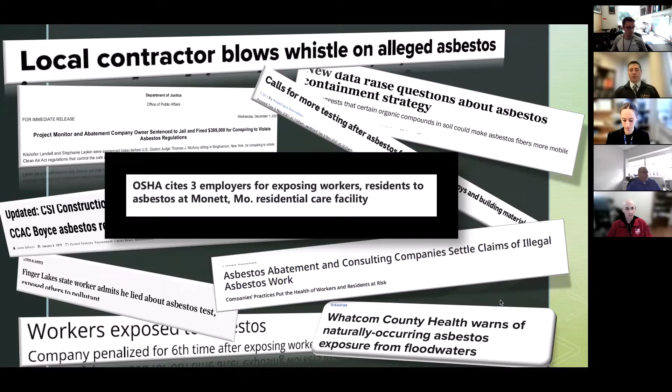But the fact is these are headlines from the last year, many from the last couple of weeks, of how asbestos is still in the forefront of the minds across the nation, and definitely as far as enforcement goes. Our local media agencies are always apt to jump on any chance they can to talk about an asbestos scare, particularly in schools.

So what regulations apply when it comes to asbestos? In New York State, we're very highly regulated. We have several federal regulations. We have the state regulation. And then if you're in a local jurisdiction such as New York City, you have your own. I highlighted two here that are going to be the focus of the conversation today. And that's asbestos in general industry regulation from OSHA, as well as Industrial Code Rule 56, which is the state regulation.

The reason why I'm focusing on these is the other ones that you see have a high level of enforcement. NESHAP highly regulates building demolition and major renovations. AHERA in schools, the different factions between the unions that are in schools, the parent-teacher organizations, it puts schools under a microscope. And whenever something's under a microscope, the enforcement action is there. And then if you're operating asbestos in construction or in the shipyard industry, again, if you're working with asbestos, you're highly trained here in New York, and the enforcement is high. And anyone who has the opportunity to work in New York City, you're well aware that the court systems are overloaded with asbestos claims and lawsuits. So there's no shortage of compliance there.

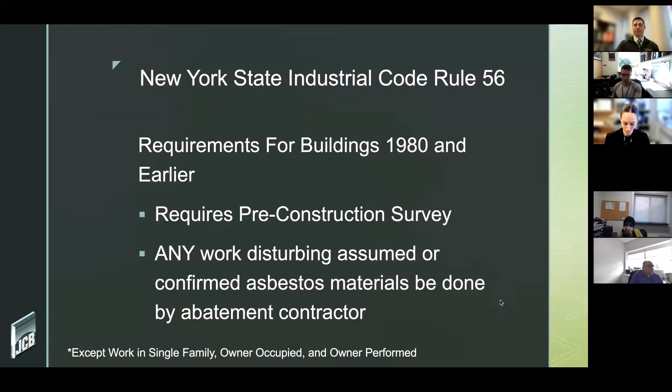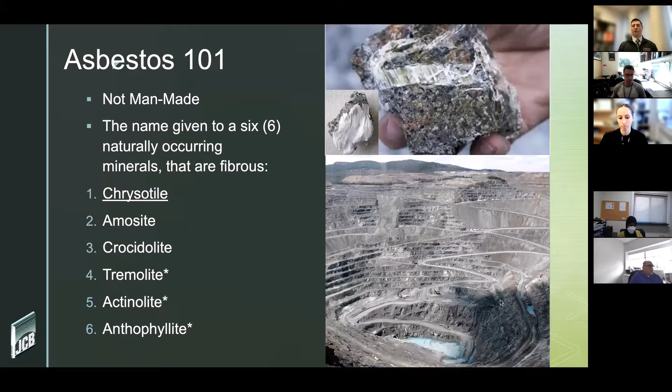It's been touted as the miracle fiber for many of its physical properties. It's resistant to heat, corrosion, fire, chemical reactions. It's biologically resistant. Mold won't grow on it. It has a high tensile strength and it could be woven into various fabrics and liners. It doesn't evaporate or dissolve, and can remain virtually unchanged under many, many conditions. It is very lightweight and therefore it can remain suspended in air and water and be carried long distances by either.

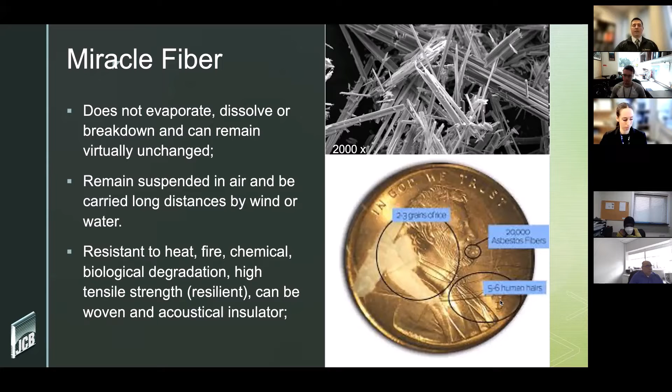Uses of asbestos go back hundreds of thousands of years. It has been found in debris from the Stone Age. Even in the Roman Empire, it's been found in fabrics woven for table linens.

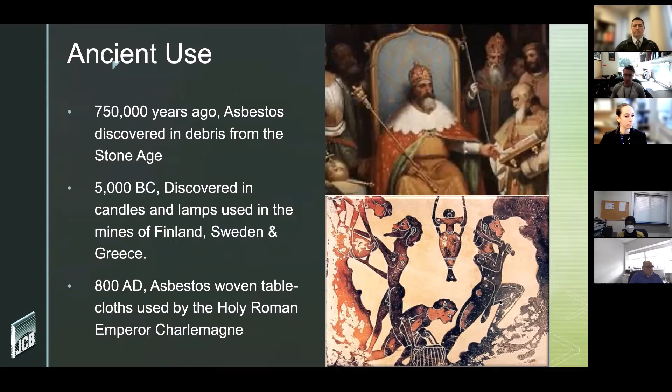But with modern day uses, the first commercial mine opened in North America around 1887. By 1930, production increased and it became the most popular construction material in the United States. And by 1980, it's been used in over 3,000 commercial products.

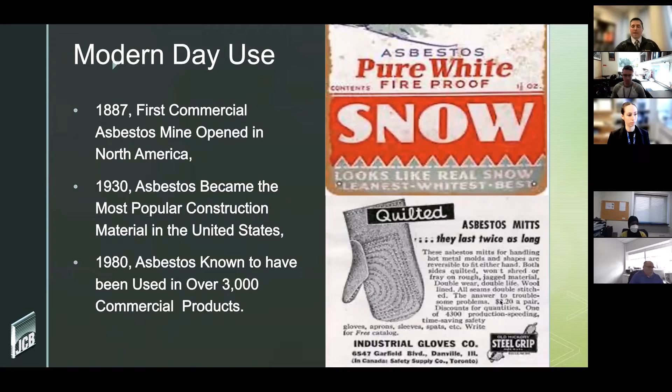For example, here we have some asbestos oven mitts where it's been woven into the fiber for its heat resistance and fire resistance. And the next slide is a couple of advertisements over the years, some scenarios that seem funny to us, but it just shows how commonplace asbestos was in our everyday life.

We have baby clothes made out of asbestos. You know, the Wizard of Oz, the fake snow used in the movie contained asbestos. All of these show how much it was common and not as feared as it is today.

Other places where we see it: vermiculite, another mineral that is common to potting soil. Asbestos is often found around the same deposits that vermiculite comes from. So we may see it in those types of applications, as well as our vehicles. Not only our buildings, we've put it in our vehicles. Brake pads, clutches, and gaskets have all contained asbestos over the years. But the most common use is for construction materials for buildings built prior to 1990.

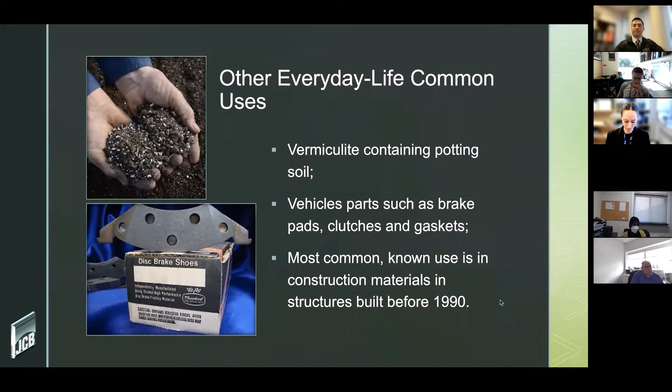So with all of the uses of asbestos, it's almost easier to start with what doesn't contain asbestos. And it basically comes down to these couple of materials: plastic and rubber, glass, wood, and metal. Almost every other type of composition out there has been industrially or commercially known to contain asbestos in its manufacture at some point.

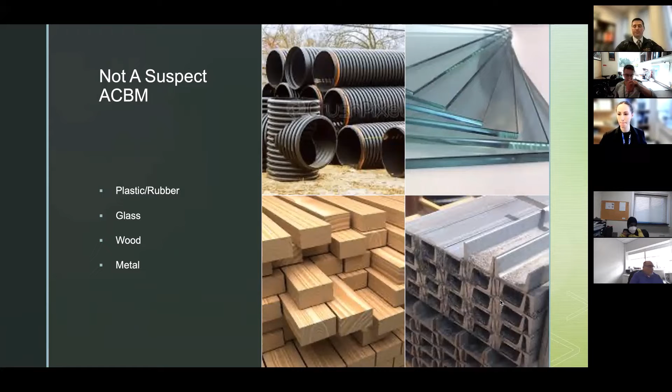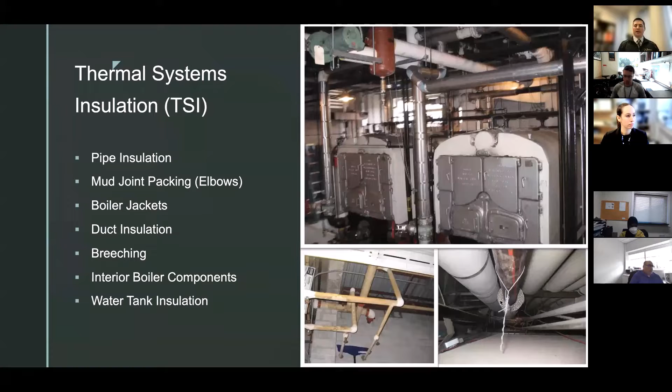Starting with the 3 categories that we classify asbestos-containing materials, we have thermal systems insulation. Again, OSHA requires that your buildings be surveyed for TSI, surfacing materials, and some flooring materials. So TSI is any product that is insulation that is meant to prevent either heat gain or loss from a piece of equipment. This is the material that most people associate with asbestos that we look for in our buildings. Pipe insulation, mud joints, duct insulation, interior components of boilers, water tanks, very commonplace materials.

The second type is surfacing materials. These are materials that are typically troweled on or spray applied when they're put into our buildings. And often the asbestos was mixed on site within the matrix of these materials as it's being installed. Some examples: ceiling and wall plaster and spray-on fireproofing material.

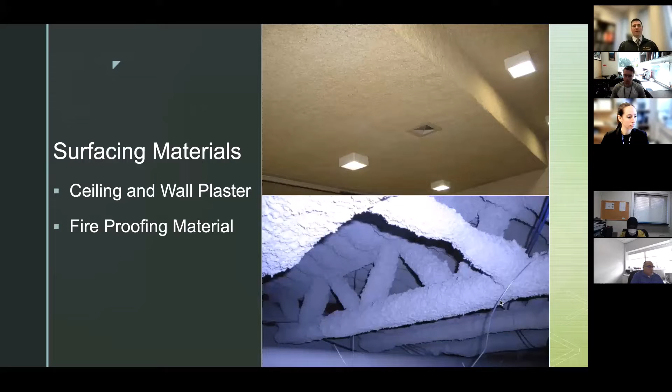Now, on the last 2 slides, we only saw about 8 different examples of asbestos-containing materials for TSI and surfacing. So everything else that doesn't fall into these categories falls into the very general miscellaneous category. And this is where we're going to find most of our building materials. Things like ceiling tiles, floor tiles, decking materials, cement transite, door insulations, various kinds of flooring, caulking materials, window glazing, auditorium curtains. The list goes on and on. This is not by any means an exhaustive list, just the most common that we see in everyday office and commercial buildings.

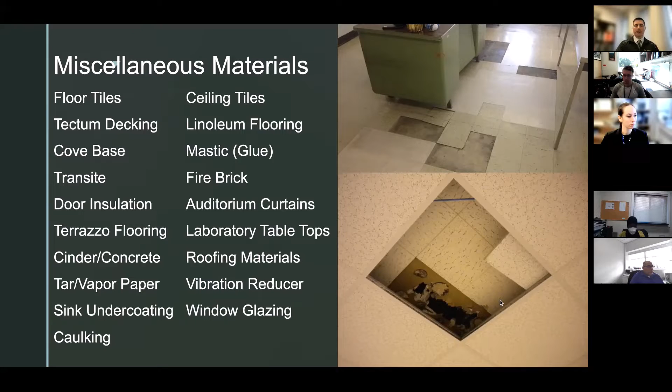So I always bring up with all these products that contain asbestos or could contain asbestos, how many here on the Zoom have performed renovations in their home or have had renovations in their offices, if they've been built prior to 1980?

For example, in your home, all of these products are potential sources of asbestos. Everything from the roof on top of your house, the roof gutters could be made of asbestos cement, heat shields for your lighting, your ceiling and wall materials, your floor materials, and then of course the ones that we always think of is the boiler and pipe insulation materials.

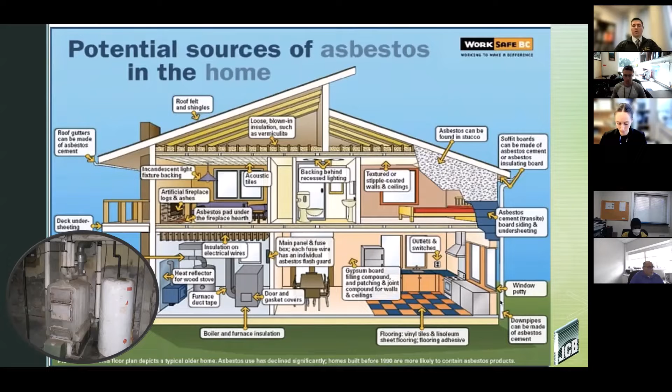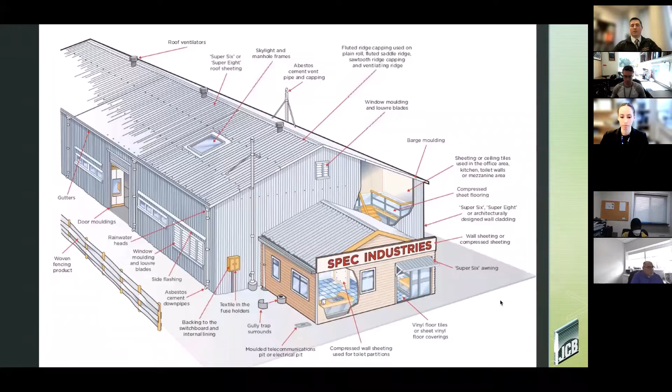Similarly, in an industrial or commercial setting, these are the same list of materials that we see in our homes, just more with a commercial or industrial application. Same thing, the roof, the skylight moldings, the skylight caulkings, chimney vents, chimney liners, as well as the interior materials, floor tile, ceiling tile, wall materials.

So with all of this said, asbestos is in our environment. It's all around us. We could expect that to a certain degree, everyone on the planet is exposed to some prevailing background level of asbestos, both from naturally occurring sources. Remember, it's a natural mineral, and natural minerals and rocks erode over time, and those asbestos fibers are going to

get into the air. Similarly, our manufactured materials, such as brake pads: if you had an asbestos-containing brake pad, every time you step on the brake, a little bit of that brake pad grinds off, and those fibers are released into the air. So there are background levels of asbestos in our environment.

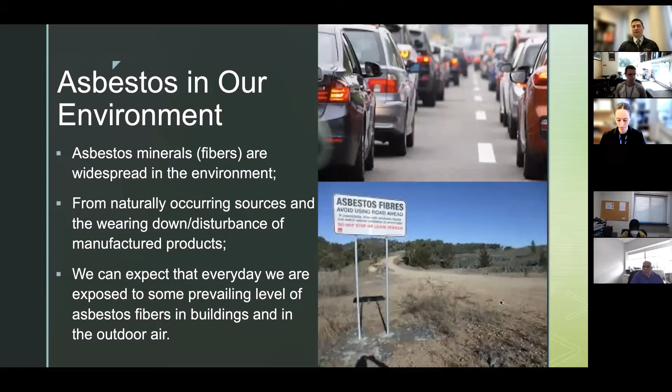So how does this affect us? If asbestos is all around us and it can make you sick, how can it make us sick? Just like any other toxin, it must enter our body. Different toxins enter our body in different ways, whether it be absorption, ingestion, inhalation. And we also need a certain exposure to it, a dose.

But if I start having several over a short period of time, I'm going to feel the effects pretty hard. And if I were to have the entire bottle in a single setting, I'm probably going to need a hospital. Similar with any other toxin, the more that you're exposed to it, the more of an effect. And it matters whether that's an exposure over a short period of time, an acute exposure, versus an exposure that lasts over a long duration, a chronic exposure.

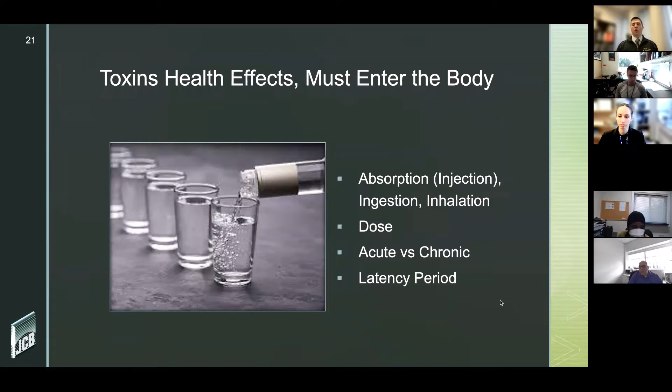And it also matters for the disease that's going to be affected. How long after the exposure does it take for your body to show the effects in the form of a disease or a condition?

Specifically for asbestos, the primary route of exposure is inhalation. As we breathe it in, some of these fibers bypass our body's natural defenses. They'll get past our nose hairs, past our mucous membranes, past the cilia, and some of those fibers will reach down to the deepest parts of our lungs in the alveoli. This is where the air exchange occurs, where oxygen from the air is transferred to our bloodstream and is traded off for the carbon dioxide.

As the asbestos fibers get deep down into our lungs, some of these are going to cause a cut in that alveoli. With any cut in your body, it's going to create a scab and a scar. You create enough of these, have enough fibers make these cuts, and have more scarring. This leads to a condition of asbestosis, where essentially the efficiency of the oxygen carbon dioxide exchange for your body is decreased to a specific level that is classified as asbestosis.

And with any other foreign element that enters your body, the cells could deform, resulting in a cancer. In this case, it would be a lung cancer. A rarer form of cancer that could be caused by asbestos exposure is mesothelioma. It does take a certain amount of time, that latency period, from the onset of an exposure to when the disease shows itself. For asbestos, that's about 20 to 30 years, with an increased chance of the onset of disease if you're a smoker, about 60 times increase.

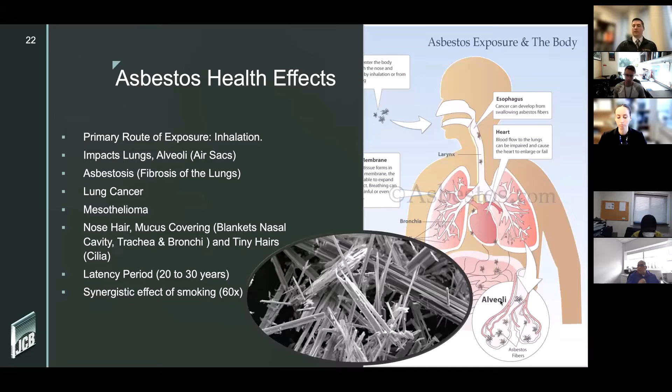So there have been studies. The Agency for Toxic Substances and Disease Registry has measured the background ambient exposure for asbestos fibers. They've determined that we breathe about a cubic meter of air in an hour, and that for background asbestos, depending on where you live, that exposure could be anywhere between 10 fibers to 10,000 fibers an hour. 10 fibers if you're in an outdoor rural area, 10,000 fibers if you have the unfortunate scenario of living next to an asbestos mine.

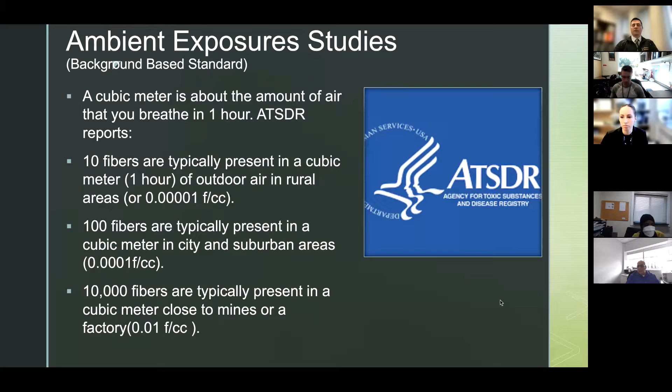But most of us are in city and suburban areas, and we could expect about 100 fibers in a given hour. And because our laboratory data for air samples gets reported in fibers per cubic centimeter, that translates to 0.0001 fibers per cc.

So again, as far as health-based standards, the risk of asbestos-related disease depends upon the exposure by inhalation, and it is dose-related. Most of the people who have developed asbestos-related diseases are former asbestos workers, because they were exposed to a lot more fibers on a given day over their lifetime than the average office worker or employee. The average airborne levels in buildings, even if they contain asbestos, are so low that the threat to building occupants is therefore also low.

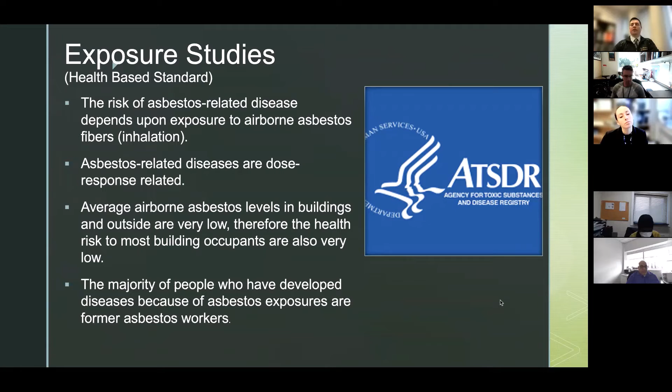There is no set threshold to say that above this level, you will definitely get an asbestos disease. But the studies have shown that the asbestos workers who have developed asbestos-related diseases have been exposed to as high as 5 million fibers per cubic meter of air. So 5 million fibers an hour, or by laboratory terms, 5 fibers per cc.

So a couple of decades ago, you could walk up to anybody and ask, hey, do you know anyone who has asbestosis or mesothelioma? And more often than not, you'll find someone who knows a relative, a friend, someone who has contracted some sort of asbestos-related disease. Why don't we have that now to that degree? It's because OSHA's been around for 50 plus years, and they've established regulatory exposure levels for asbestos. And therefore, the onset of diseases have decreased.

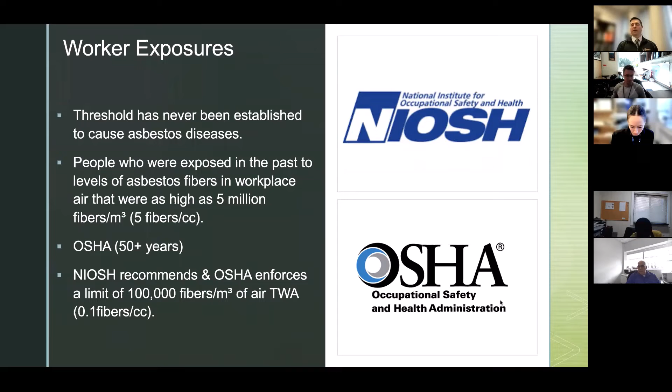Specifically, NIOSH and OSHA recommend that they have a limit of 100,000 fibers per cubic meter of air as a time-weighted average, again, translated to 0.1 fiber per cc. That's the OSHA PEL for asbestos fibers.

Living here in New York State, whenever an abatement project is done, whenever a planned disturbance of asbestos occurs, they would set up a containment barrier, and that containment barrier cannot be removed until we meet an air clearance standard of 10,000 fibers an hour, or 0.01 fibers per cc. So significantly less than what the OSHA PEL is, and definitely significantly less than what the asbestos workers could be exposed to based upon past studies.

So I'm going to go into a couple of different EPA regulations that have been established to minimize your exposure to asbestos. I had touched upon NESHAPs earlier. That regulation is to make sure that building demolition and renovation doesn't result in asbestos fibers being released into the air. And keep in mind that the EPA identifies an asbestos-containing material only when it contains greater than 1% asbestos.

For example, if your ceiling tiles contain 1.2% asbestos, you're going to have licensed workers come in, they're going to contain the area, vacate the area, set up all this plastic and remove it as a regulated material. If your ceiling tiles contain 0.75% asbestos, that could be done by a general demo team under any other construction project. It'll look like any other construction project.

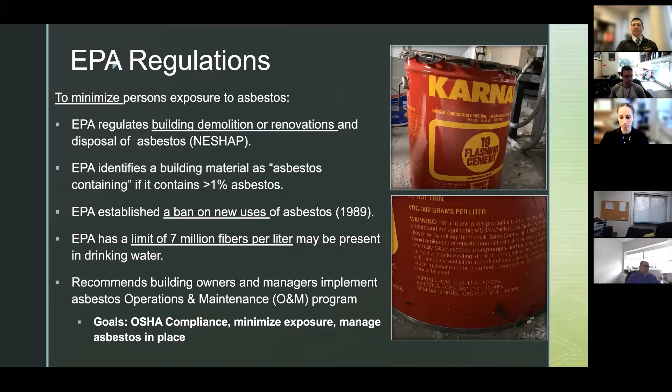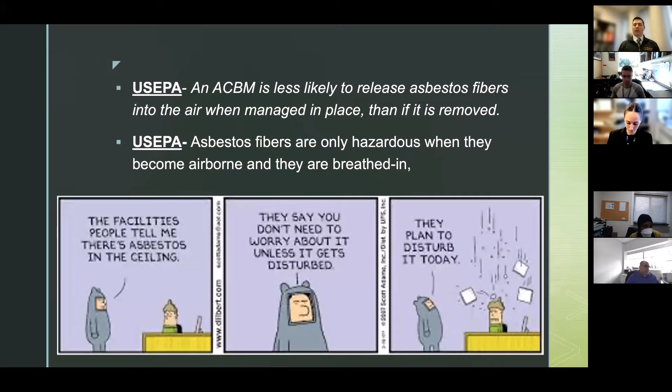So what are the key elements of an operations and maintenance program? The EPA does have their other regulation governing schools, K through 12 schools, under the AHERA program, where they mandate an asbestos management program. Similarly, they recommend that you model that for your private organization.

They first say you should appoint an asbestos program manager. This person needs training. They have to receive a training similar to this, making them aware of the background of asbestos, the health effects, its usage, how to find it in the building. And this person should be responsible to oversee all asbestos-related activities at the facility.

They must also have the authority over the people in the facility to ensure that if they tell someone not to proceed with an action, they have that authority to tell them not to do it. Typically, this is the facilities manager, and in some cases, it's the health and safety director.

Item 2 is perform an initial inspection of the building. How do you know where asbestos is unless you walk around and you inventory all of your building materials? This person should be trained and accredited personnel here in New York State. That person would maintain a New York State Department of Labor asbestos inspector's certificate.

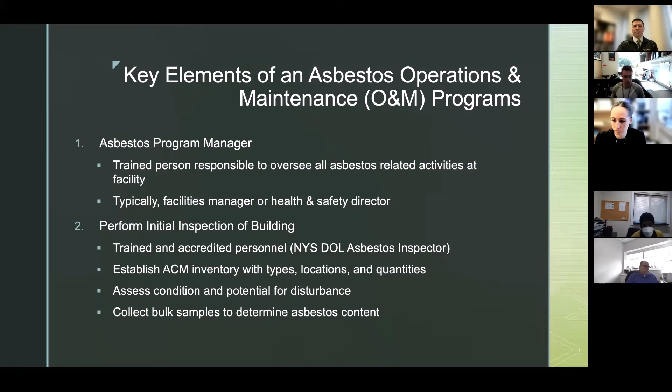And I'll digress briefly on the bulk sampling process. Again, here in New York, that person must be trained and accredited to perform bulk samples, that same inspector certificate. The reason being is that there is a chance of releasing fibers by the physical disturbance of collecting these samples.

That person should be trained on proper work procedures, as well as how to collect the right number of samples, homogenize it to make sure that those samples are representative of specific areas in the building, to quantify it, make sure that it gets to the correct laboratory who's qualified to analyze those samples, and by the current methodologies.

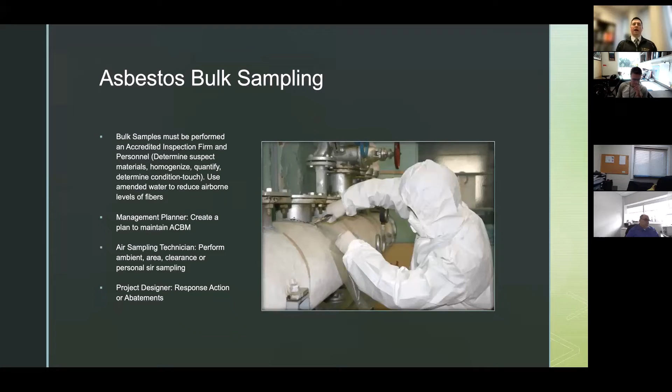So moving on, the next element of an O&M program would be the occupant notifications. OSHA requires that you inform your workers, including outside housekeeping personnel or any maintenance staff, of the locations of asbestos and its quantities. EPA takes it a step further in recommending that any occupant of your building, including tenants and any other outside contractors, also be notified.

A couple of things you may want to include is that asbestos does exist inside your facility, and it's maintained in an O&M plan and is periodically inspected. You want to notify them of who the asbestos program manager is and what is the procedure for contacting them if you are doing work in the facility that may disturb building materials that could be asbestos. On the next slide, I'll discuss an example of a work permit program.

You must instruct them that no persons are to disturb any ACM materials. And additionally, if they come upon materials that appear damaged, if they come across debris, how to react, how to notify the asbestos program manager, and what are some emergency response actions to take.

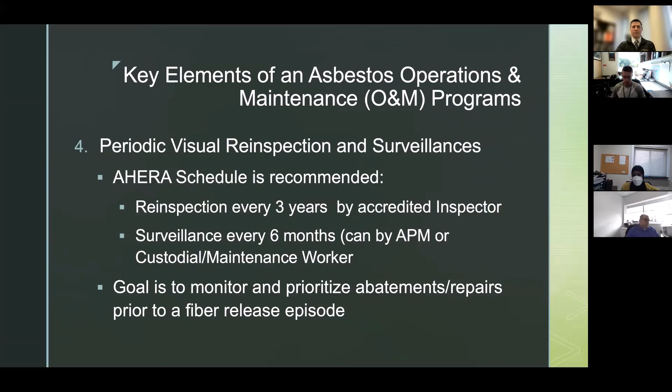Next is, when you are going to disturb asbestos, what are the job site controls? What are your company's procedures and policies for making sure that that is done right? Here in New York State, that is very simple. Most companies do not keep asbestos abatement workers on staff. So in most cases, this is going to always be done by an outside contractor. Again, here in New York, any disturbance of an asbestos material must be performed by a licensed abatement firm using certified supervisors and handlers and workers.

Most often, air monitoring is required on these projects in accordance with Code Rule 56. That air monitoring must be performed independent from the abatement contractor. So the air monitoring firm cannot be the same entity as the abatement firm. And that firm must be licensed and must use certified project monitors and air sampling technicians. And a best practice for your O&M plan is to identify who these people are before you do a project. It's always good to have these numbers on hand, have a relationship with these firms in the event of an emergency. You don't want to be searching Google for an accredited abatement firm when your building's on fire. And that's what I mean by emergency situations.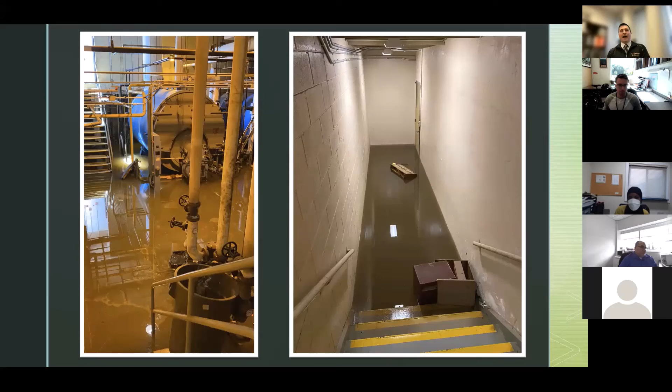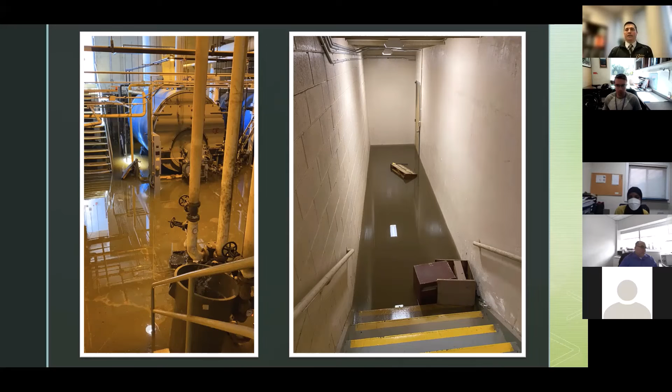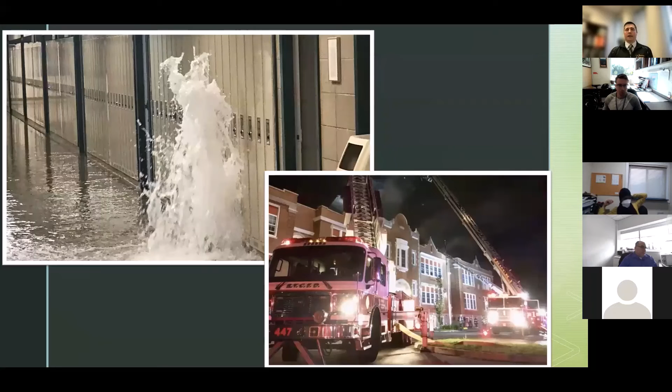It can be something as catastrophic as a hurricane came to town, and now your boiler room is underwater and you need to get your building back online as soon as possible. This may have impacted asbestos materials. Having a consultant or an abatement contractor on call to assess and assist you through this would be most helpful ahead of time. Similarly, pipe breaks, fires, any sort of catastrophic event. And it doesn't have to be catastrophic. It could simply be a loading delivery truck backed into your building and caused some damage. Maybe a very small area, but to have people on hand would definitely be useful ahead of time.

And last but not least is the record keeping. OSHA requires that any asbestos related activity in a building you own be kept for the duration of your ownership. And not only that, but that these records should be transferred to any successive owners. So if you sell the building, you should be handing over these records to the new owner so they have the knowledge of everything that you've maintained over the years. And what are some examples of records? We have your initial inspection reports, assessment reports, all training records for any program managers, your custodial staff, the O&M plan, any amendments, your re-inspection reports, any laboratory reports. Abatement reports are very important, as well as the waste manifests that you are going to receive from the contractor.

Really, any asbestos related activity should be kept in an organized manner within your O&M plan. Because if and when a complaint comes across your table, and OSHA or the Department of Labor is coming down on an enforcement action, having this information to show that you're doing your due diligence is very, very useful to have in an organized way. And the question that I normally get at this phase is, Ed, at the beginning of the presentation, you mentioned how OSHA, in general industry, is probably the least enforced. So why do I have to do this?